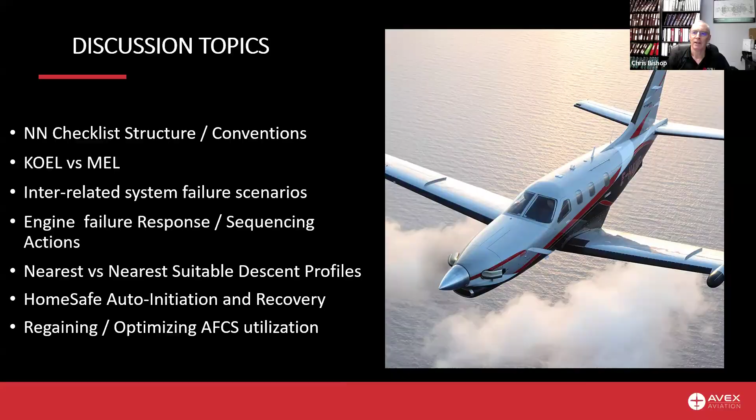So continuing on from that list of topics: non-normal checklists, of course, the POH gives you the fly the airplane directive. And despite whatever critical situation is happening in the aircraft, keep focus on aircraft control. That's the imperative given in all of your non-normal checklists.

The next thing I want to bring to your attention is the definition of land as soon as possible, which means land at the nearest suitable, versus land as soon as practicable, meaning nearest suitable runway with convenient facilities or operational considerations for, let's say, crash and fire rescue, or perhaps there might be maintenance on the field that would allow you to be serviced and then continue the trip, versus stranding yourself somewhere where recovery might not be as convenient.

Maybe you need something to take care of passengers. If you were to land at a very short field, are there any emergency services for injuries or medical services available? Those are practicable concerns.

Nearest possible really does mean absolutely the airport right underneath you. I mentioned in the presentation I did in person at the safety seminar, there was an owner who bypassed one or two suitable places to land, but his truck was located at the destination he wanted to land at. He continued on and landed safely, but was violated by the FAA for not landing as soon as possible. I'm not sure the definitions or the metrics the FAA would use for something like that, but certainly something to bring into your list of considerations.

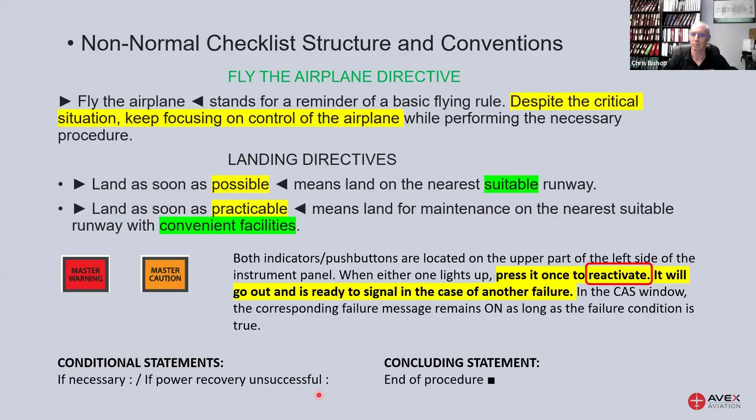So when you're reading the non-normal procedures, you'll get to a conditional statement. That should cue you to ask: am I concluding the checklist, or do I need to move on because this isn't the actual end of the checklist, since my conditions aren't meeting the concluding statement conditions?

All right, this is the kind of operation list versus the MEL. The day and night VFR operations, anything in all of those kinds of operations listed in the POH, it says specifically must operate perfectly according to the indicated type of use.

In addition to the above equipment list, you also have flight into known icing, pressurized flight, and RVSM operations. So keep in mind things that are going to be required for each of these types of operation must operate perfectly.

As a ferry pilot or service center pilot, I'm regularly going to retrieve an aircraft with known defects, and I have to determine whether or not I meet the conditions to operate perfectly for the type of operation. But as a discretionary departure pilot, you could really decide, is this something I can classify as operating perfectly for the kind of operation?

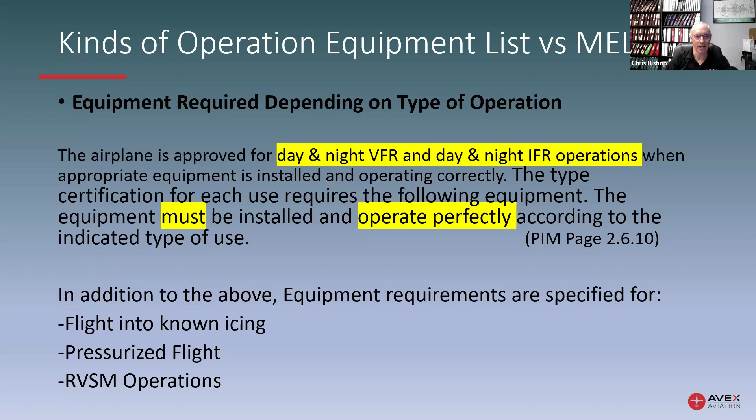If, on the other hand, you have an MEL, the MMEL is a generic per-model list created by a company like Jet RVSM. From that generic MEL, they'll build you an aircraft tail number and owner specific version. You'll notice here I've blanked out the tail number and serial number, and the title page had the name of the owner operator. So this is specific to each aircraft tail number and owner. It also requires training and authorization before operational use.

In any of these MELs, you'll notice right here where it says O and M. Those indicate there is an operational requirement - that would be a pilot procedure listed in the MEL. And then an M for maintenance procedure, meaning there's something a maintenance technician has to do prior to being able to operate under the conditions of this specific MEL.

You'll notice that for any of us operating on a KOEL, a loss of a standby generator would be a no-go. However, under an MEL, we could operate with a standby generator inoperative as long as we meet the conditions listed here. One of the risks here is that you're given the latitude to operate with a lesser order of redundancy, which increases operational risk because you have less system redundancy. So it requires the discretion to know, am I really not going to go into icing conditions as listed on this condition? Should I do this, rather than can I do this, should be the operating mantra when using an MEL.

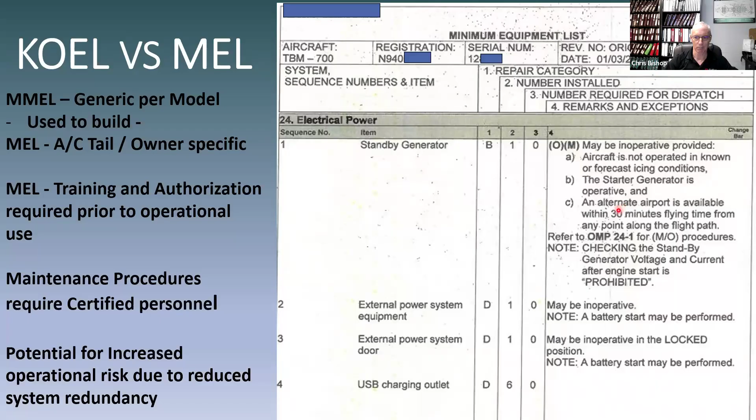The interrelated system failures that I had gone and done research on, I'll go through these items one at a time. I won't read the whole list here - I'll just work my way through it.

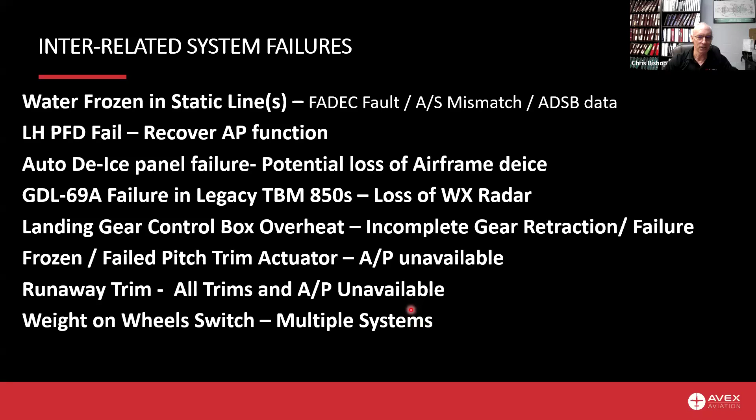The first one I want to go into was an actual scenario I ran into picking up an aircraft to go do a sales demo. This was in a 960. As I began to level at 280, the first thing I saw was a FADEC fault message. Now, the FADEC fault message was not actually a FADEC fault - it turned out to be a static fault.

So you'll see I pulled up the FADEC fault message. Not a lot to look at here - basically, fly the airplane, land as soon as practicable, and of course you're no-dispatch when you get on the ground. So that came to mind when I thought of where I would want to land.

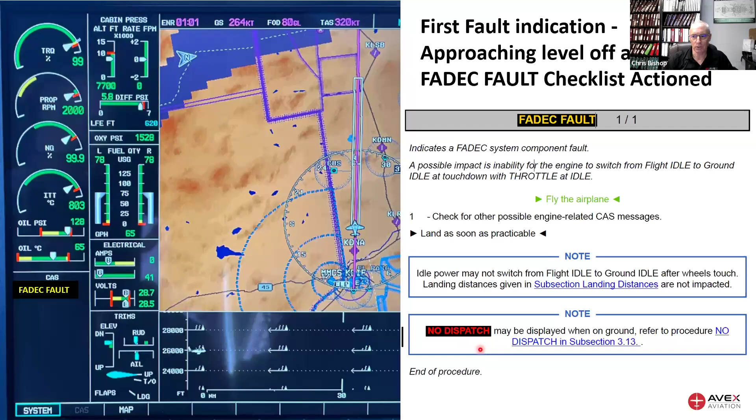So the next question was, while reading this checklist, I look out of the corner of my eye and see an IAS fault indication. So the actual indication of the fault was the IAS flag telling me I had a static fault. I then disconnected the autopilot because it was flying off erroneous airspeed and altitude information. Then, hand flying the aircraft, I pulled the alternate static source and, flying only on the standby instrument by hand, started reading the airspeed unreliable checklist.

As you'll see here, it says: check that your pitot heats are on, check your alternate static source, and then use the standby instrument only. And if the symptoms persist, perform a precautionary approach, maintaining appropriate airspeeds.

ATC told me they saw me descending, even though I wasn't, because the static fault was giving them erroneous data - also my ADS-B information was faulty. So I asked for a block altitude between 24 and 280 to give myself some leeway while I sorted out the error. Eventually, because I had VMC down to about 10,000 feet, I asked for a descent below 180 and canceled IFR.

While I began that descent, however, my airspeed began increasing. With a blocked static line, as you descend, the airspeed will increase. That could cause an overspeed indication, which would cause the stability and protection system to take over, engage the autopilot, and try to pitch the aircraft up to keep me from overspeeding. So to avoid the max speed, I reduced thrust substantially and maintained speed within the indicated airspeed range.

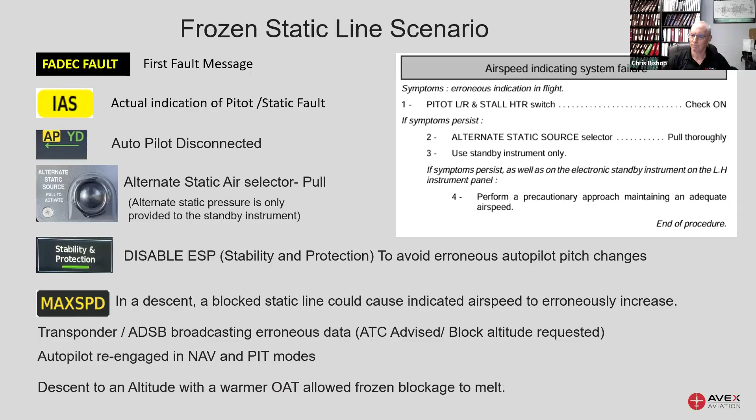Another indication that one of our owners had was a failure of his left PFD. What he had was the screen on his left-hand PFD completely went blank. Then the autopilot kicked off, so he was hand flying the aircraft. He tried putting the display backup button to send the information to the center MFD.

That didn't allow him to re-engage the autopilot. If you read the checklist for that version of the 930, the legacy 930, not the NG, it recommends you press the offside display backup button and then transfer, and then you can regain the autopilot. In his case, he was not able to regain the autopilot using the normal onside. I've tried this in a number of aircraft, even as recently as yesterday and today, and it really is dependent on the software version of the aircraft, whether you're in a G1000 or a G3000 Legacy versus a G3000 NG.

In a 940 and a 960, in both cases, the autopilot remained engaged. It was a simple onside display backup button to bring your data to the center MFD. I tried it in an 850 non-NXI, and it kicks off the autopilot right away. However, a simple transfer and an offside display backup to bring the center MFD data, and the autopilot was able to be re-engaged. The autopilot functionality should be able to be regained in almost all scenarios, unless you also have an AHRS failure.

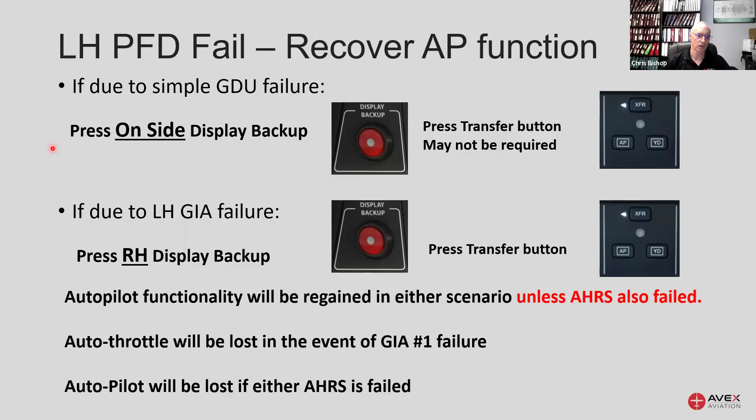This is a picture from yesterday in a 940 with the PFD number one circuit breaker pulled. You can see that I've also lost my GTC number one. In this particular case, the autopilot is still engaged. So all I had to do was onside display backup and bring my data to the center screen. And I never did regain my GTC number one until recycling power on the aircraft.

An interesting scenario. This did not happen in a 960. I also just tried it today in a 930 NG, and it did not give me the loss of the GTC. So really software dependent.

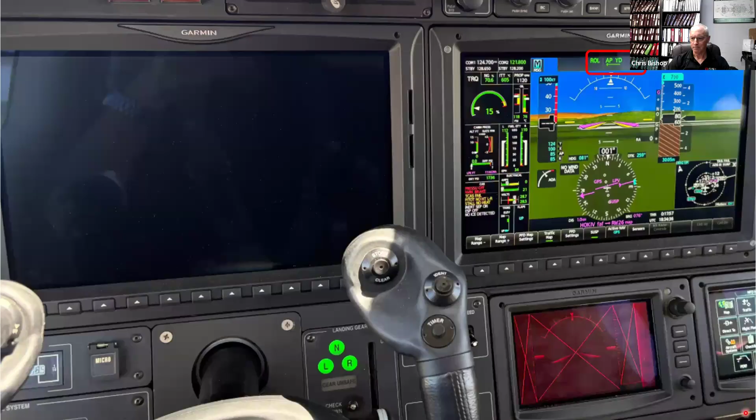In this particular scenario, I've given you an outline of everything that's on each of the GIAs, and you can see there's a lot of different interrelated systems connected to the GIA. So the GIA is not a single unit all by itself. What it is, it's a combination of circuit boards plugged into a processor. So you could lose individual components. So to say you're losing the GIA is a bit of a misnomer in the sense that it isn't a single unified piece of equipment.

However, you'll see here that AHRS number 1 can feed its on-side GIA. It can also feed its off-side GIA. However, losing either of the AHRS does cause a loss of the autopilot. If you end up with a both-on AHRS X message, chances are that you will have lost the autopilot and won't regain it.

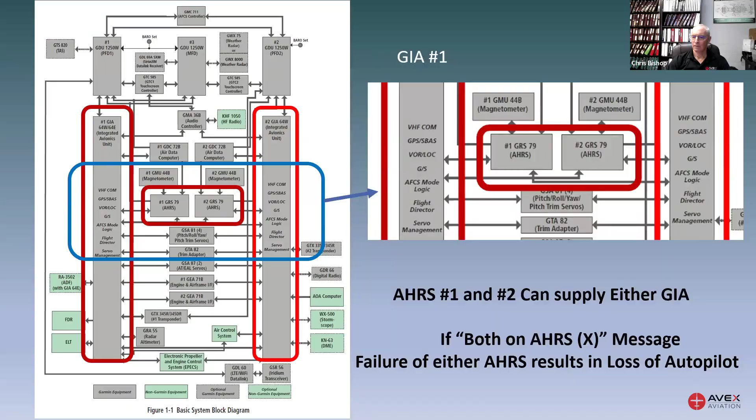In the event of components or an entire loss of GIA number 2, you can see there's a number of items that you would lose along with that GIA, including your NavCom number 2, your transponder number 2, the TAWS, HomeSafe, and the autopilot drops off and you'd need to accomplish a transfer. If you were transferred onto the number 2, you'd need to transfer back. An unlikely scenario, I'm sure, for most of you.

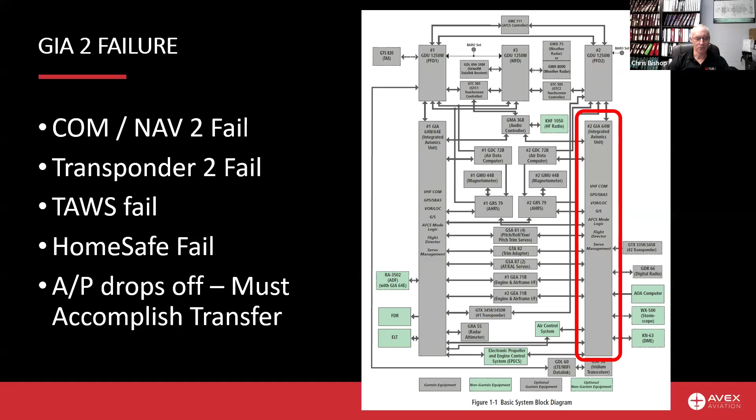Here's the AHRS failure checklist. As you can see, we get to a place here where we're going to have a conditional statement. Continuing, if both AHRS 1 or 2 is annunciated or not associated to heading, pitch, or roll, the PFD 1 and 2 sensor soft keys reset, and then if the annunciation checks off, then you can use the autopilot normally.

So follow the checklist, look for your conditional statements, and if you meet certain conditions, you then could regain your autopilot functionality. I'll leave it to you guys to really read through the checklist and verify that you're following the logic. Sometimes it is a little bit obtuse.

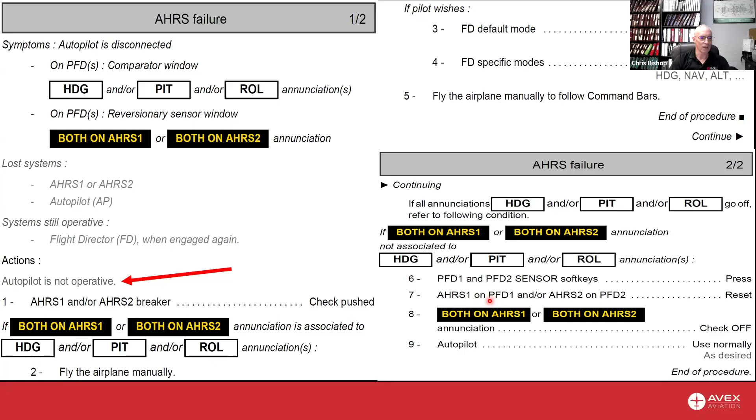Another failure that we had: one of our owners reported that their ice detection fail CAS message came up. The boots continued cycling, the inertial separator was stuck in the on position, windshield de-ice was on, and the prop heat stayed on. All of these systems are allowed to operate continuously.

As you see in the note, it says in case of failure, they'll be forced on for the remainder of the flight. There's no time limitation on the use of the de-icing systems. In this particular case, if the windshield overheats, the overheat mechanism should cause them to shut off while in an overheated condition, so that would protect you from an overheat.

The prop heat, when you get to the shutdown, normally we wait for the AUX boost pump before turning the master off. I would recommend, if you had this condition, as soon as you shut down, within 15 seconds, go ahead and shut power off so that you don't overheat the prop de-ice blankets and cause a delamination, potential for delam on your composite propeller.

In most cases, this fault has reset after a power cycle of the aircraft. So that's the one admonition I would offer on this particular failure: just make sure that you get the power cycled off before you exceed 15 to 20 seconds with the propeller not spinning, cooling the prop heat blankets.

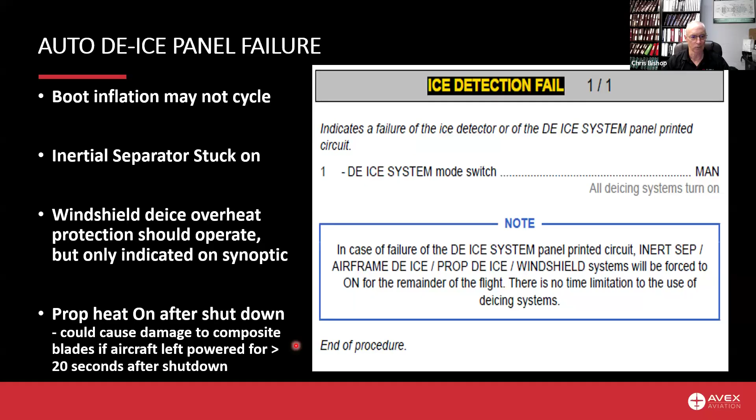For those who have an older aircraft, if you had a legacy 850 with a GDL-69A, in that version of the aircraft they didn't have enough ports to plug in everything. So the weather radar, the only port that they had available was on the GDL-69A instead of the GIAs in that aircraft. So this serial number range is, if your aircraft is affected by this, if the GDL-69 were to fail, you would then also lose your weather radar.

If you're getting your XM weather via the GDL-69A, which is where you would get it, you'd also lose your XM weather. The only weather that you would then have available to you would be the FISB weather. So if you're lucky enough to have an ADS-B in transponder that brings in your FISB weather data, that's how you would have weather in that particular failure scenario.

Probably not all that prevalent for most of you. However, for the serial number range affected, I kind of want to make sure and mention this.

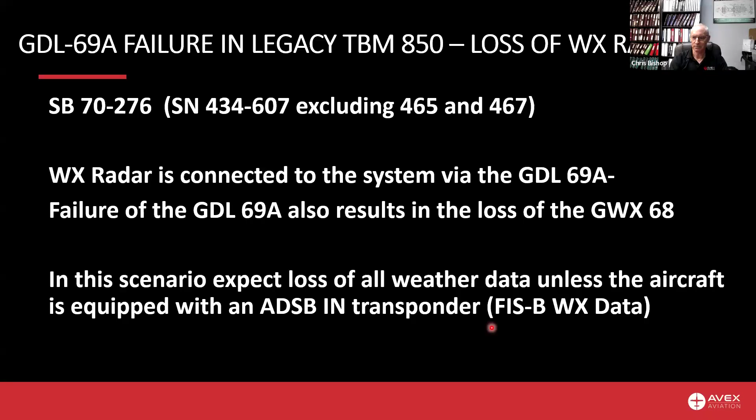All right, we also had an issue recently, actually more than one, where we've had a landing gear control box overheat issue. There was a service bulletin, and there's a thermal switch that was limited to 140 C that was causing the problem, and it disabled the entire landing control box.

So putting the gear down using the normal method was not working, so it required resorting to a manual extension. The first indication people were getting was that their climb performance was not what they expected it to be, meaning either full or partial gear retraction, leaving landing gear hanging out in the wind, causing them reduced climb performance.

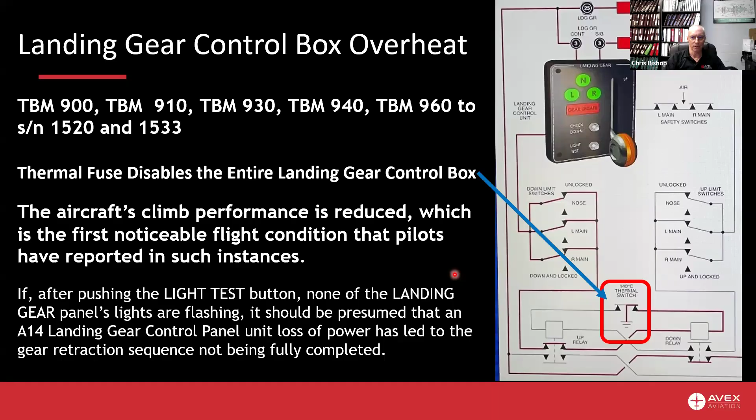If after testing it with the lights test button your lights are not coming on, that indicates that the box has failed. So Daher's flight information letter, emergency landing gear extension procedure, reminds you of the necessity to perform that procedure if in any doubt.

So we had an owner who was flying along, was having the limited performance because the gear was still hanging out. The lights were not coming on when he pressed the buttons on the box. To keep him from having to continue to a service center, after reminding him that this procedure was necessary, we also then suggested pulling the landing gear circuit breaker, the landing gear signal breaker, and the landing gear control breaker. And that reset power to the box, which then allowed normal operation.

This is not a recommended procedure. I leave it entirely to your discretion if you wanted to go outside the box. It's a bit off the reservation, and I can't, as a service center representative, make a recommendation, but I'm advising you that this exists for your own discretion. The CYA from Daher is thou shalt use the emergency landing gear procedure if any questions exist.

If you are affected through the serial number range 1533, this replacement fuse, I believe, is part of the procedures being implemented as the aircraft come in through normal cycles of service evolution.

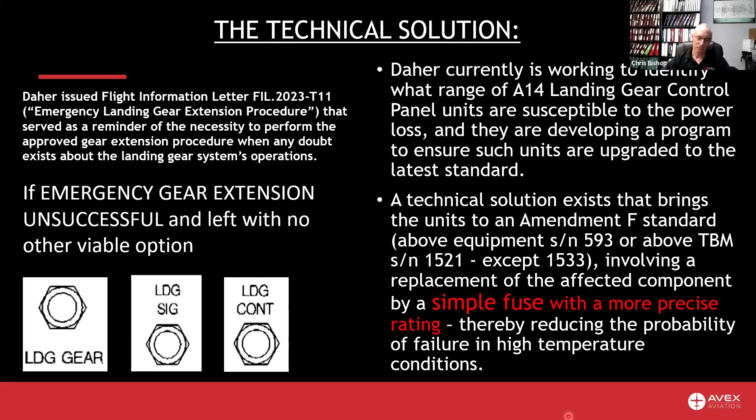Any of you guys flying a TBM for any length of time will be familiar with this concept of the drain holes on the pitch trim actuator boots. The one thing that we don't kind of talk about is what would be the first indication. Most of us would notice this elevator mistrim condition.

The autopilot would normally be trimming it. If it shows this elevator mistrim condition for a length of time, that might be an indication that the pitch trim servo is holding a sustained load longer and greater than is normally accustomed, which would then trigger someone like myself.

I would think automatically, let's get a control steering button push and see if the pitch trim or the pitch servo is holding a load. If so, manually trim, which would kick off the autopilot, and then I'd see my pitch trim is not actuating. Now try the manual pitch trim and see if that's also jammed because of a frozen actuator. At that point I'd want to maintain the trim speed and get to warmer air and melt the ice off to regain functionality.

Not something we're going to see very often, probably never, if you've done an adequate pre-flight and checked for either stripes or visible holes during your pre-flight inspection.

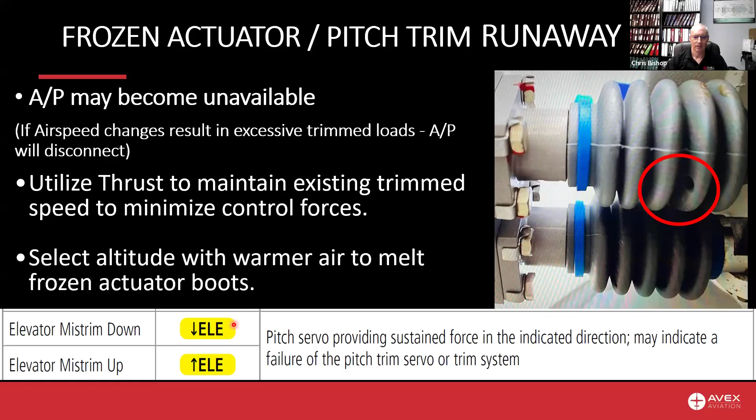If you had a trim runaway, which is a different scenario, the autopilot trim disconnect button is the memory item, listed in the box there as autopilot trim disconnect push button. Now all three trims are disconnected.

Then you could turn the autopilot trim switch to off, and then release the autopilot trim disconnect button. Now pitch trim is available to you with the manual trim, but the rudder trim and aileron trim would no longer be available. So in the event of an actual runaway, you'd also lose the electronic stability and protection.

Rudder trim in the arrival portion of the flight would probably be the highest threat item in a trim runaway scenario, where you've disconnected all of the electric trims for the aircraft and you're only on manual pitch trim.

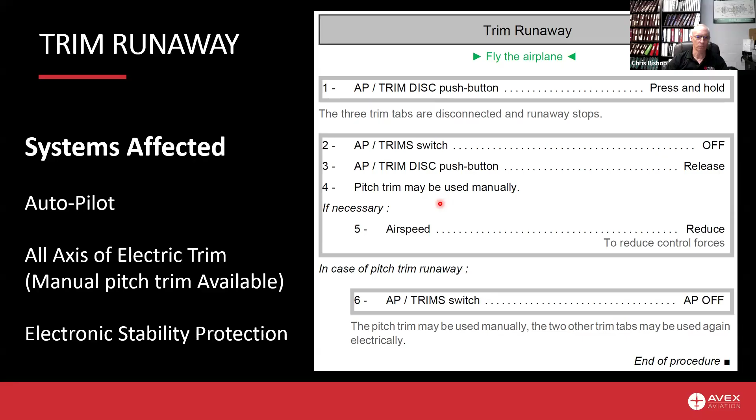Another one, not very common but worth considering, shows how many systems are tied into one particular switch. In the event of a weight on wheel switch failure - not a big item for most of us - the Hobbs time wouldn't be recorded, but your ground fan would remain on, and you wouldn't, in theory, be able to retract the gear.

Your stall heat would remain in its low setting and wouldn't go to high for in-flight. Your transponder would have to be manually switched to the on position. Cabin would not pressurize. And radar, most of us wouldn't concern ourselves with unless problematic, but you'd have to turn it on or off manually. The most important issue is if you took off and couldn't retract the gear - we'd be looking at returning to base right away to get this serviced. But I thought it was an interesting example of how many systems are tied into this one switch.

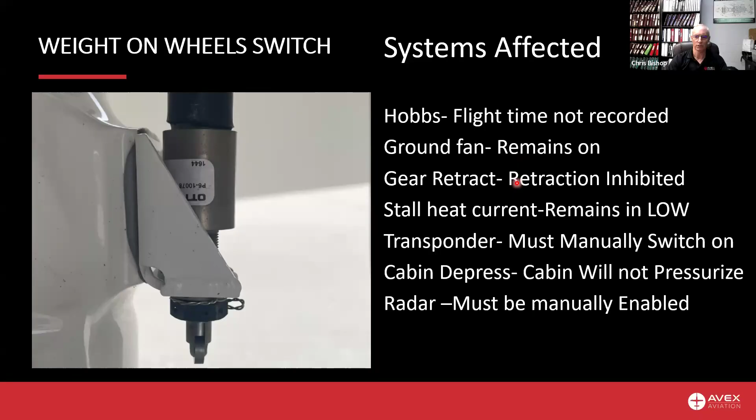For those of you who have electronic stability and protection, being able to turn it off, in my mind, is just as important as having it. We've had a number of owners who didn't know how to turn it off and were occupied mashing the autopilot trim disconnect button over and over to maintain control of the aircraft when erroneous data was being sent to force this electronic stability to kick on.

If you have a G1000, it's a simple matter of going to the AUX system, then looking for setup - AUX system setup, then setup number 2 - and you'll see the disable or enable radio button there on stability and protection.

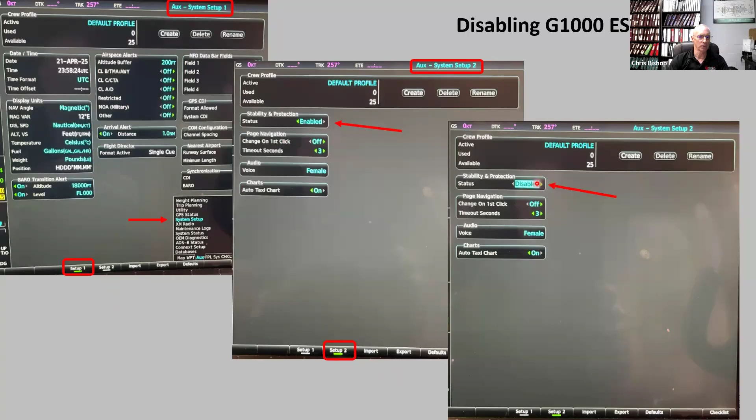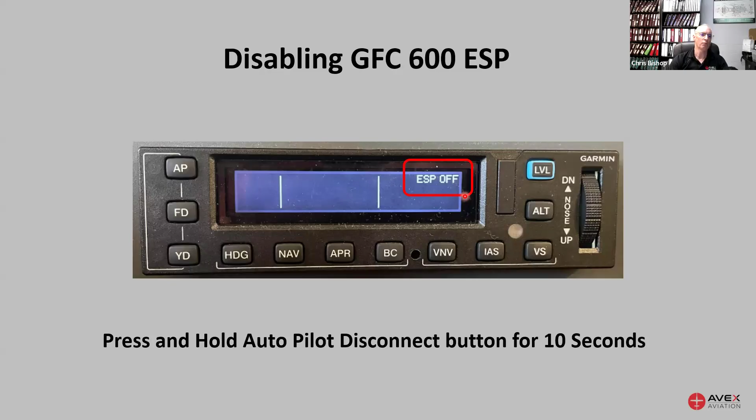If you have a GFC 600 autopilot, pressing and holding the autopilot disconnect button on the yoke for 10 seconds will cause ESP OFF to annunciate on the display window. Now ESP is off until you re-engage the autopilot, then it automatically kicks it back on again - or should I say enables it and arms it for future engagement.

If you have a G3000, again it appears more convoluted, but for those familiar with it, it's simply go to the home screen, setup, avionics settings, then scroll down and you'll see the stability and protection icon there. Simply tap the radio button to disable it.

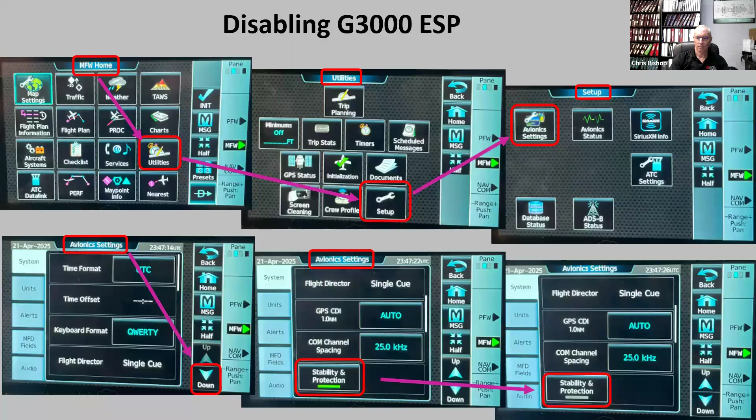All right, that's the end of our discussion of interrelated failures. Some of it's relevant, some of it may be a bit obscure and highly unlikely. I appreciate your forbearance in listening to the stuff that is not related to your aircraft type.

To the discussion about land as soon as possible versus as soon as practicable, I broke this down into groups of considerations. Obviously the first and most important is the aircraft - let's get the aircraft to our best glide speed. That gets us the greatest amount of time to make a decision.

One of the things most of us will do is if the engine failed at 31,000 feet, we're thinking oxygen. I didn't put that here as the very first option, but obviously if your cabin altitude is at, let's say, 9,400 and the bleed were to stop coming in because of an engine failure, your cabin altitude is going to climb very quickly.

So the first thing you're going to look for is, let's get to the best glide speed. And is my cabin uncontrollable? Is it coming through 10,000 feet?

Let's get the oxygen on. For those of you who haven't really done a lot of practice getting the oxygen mask on, my recommendation is to flop the harness forward over the front of the mask and simply put the mask on your face right away. Then take off the headset, the sunglasses, and inflate the harness and pull it over your head, then release and allow the harness to hold it. Get the mask on your face first things first, and then you can arrange the harness and the headsets afterwards.

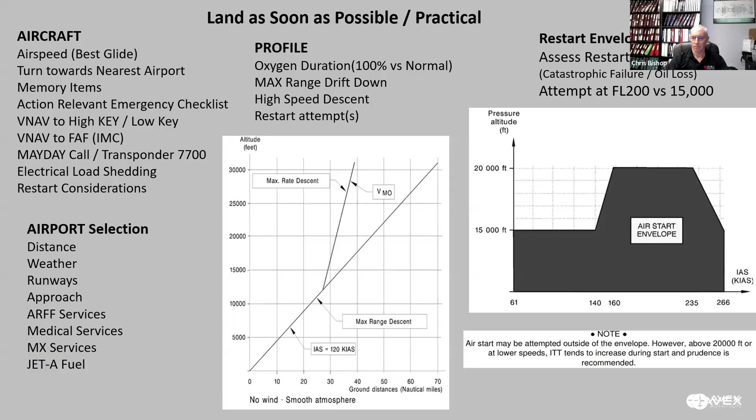Most of us have not spent a lot of time with the oxygen masks. I recommend every time you check the oxygen during your pre-flight, verify that this 100% button is in the down position. The lever down indicates 100%. If you move it to the up position, what that does is it mixes ambient air with the oxygen to extend the range of your bottle. For every emergency that we can ever conceive of, we should always start with 100% oxygen, then as needed, move to the ambient selection.

In the event that you have smoke in the cockpit and you want to evacuate smoke from the goggles, you could select the emergency to on, and that would blow air, force air through the little window in the front of the nose piece into the goggles to clear smoke from the goggles. You could use this also as a pressure breathing device if you really needed pressure air during a rapid depress. Again, a highly unlikely scenario, but it's good to have the familiarity with what the features of the oxygen mask are.

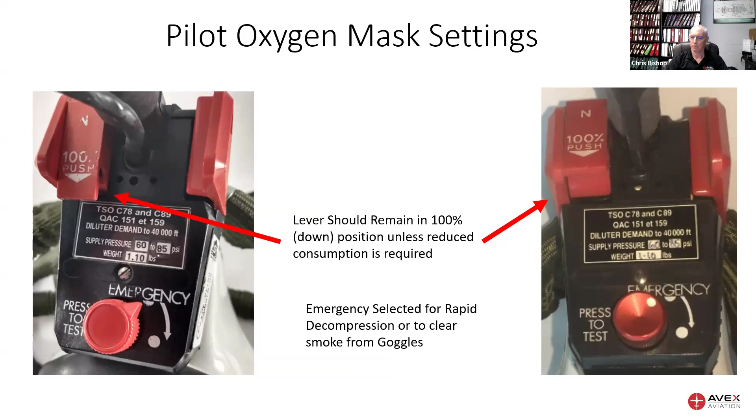The auto deployment of your O2 masks, the manual says between 12,500 and 14,750 feet. And of course, to get those passenger oxygen masks to deploy, the pilot O2 mask switch must be in the on position. You can manually deploy them by removing the little plastic cover piece and actuating the passenger oxygen switch.

I test this on every test flight that we do. I verify that it automatically deploys. If it doesn't automatically deploy, then I manually deploy them.

If one or two of them fail to deploy, it's good to know that the cover can be removed manually by the use of a pen or some other device to pry the cover off. It's simply attached with tension clips. And when the masks do fall, there is a lanyard that has to be pulled to get the oxygen to flow, much like the announcement you've heard on every airliner you've ever sat in the back of.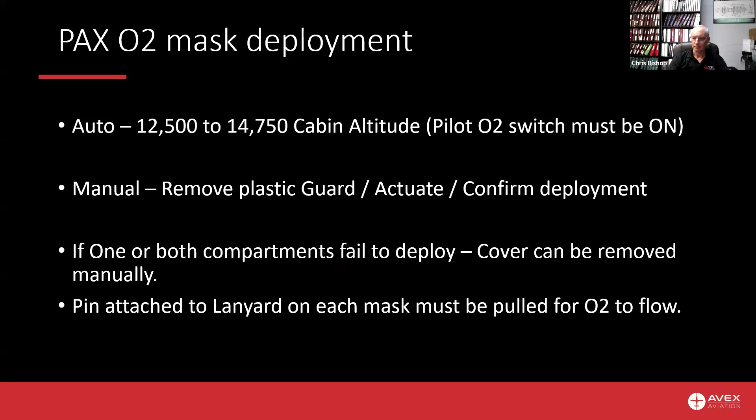Let's talk a little bit about engine failure scenario. I'm not sure if you guys have done the same as I have. I've run the thought experiment while I'm in the middle of a long flight and thought, okay, what would be my first action, second action, third action? And I have to admit, I have struggled to come up with a more or less universal series of actions. It is somewhat scenario dependent. I would have a different set of actions at 5,000 feet than I would obviously at 30,000 feet.

So one of the most important items, and I asked this at the presentation that I did in person, which one action is going to be the most critical to making sure that you have the most amount of time to make your decisions? And that is get the propeller feathered. In fact, if you lose the engine, you're soon enough going to lose oil pressure. If you lose oil pressure, the oil pressure to the propeller hub is going to diminish to the point where the springs are going to force it to feather anyway. So I may have been a little less clear on that in the in-person description of this.

It's my theory that on every single takeoff, I'm going to climb at VY to 10,000 feet. For most of us, that means 130 knots. For our auto throttle aircraft with a VNAV profile of 124 knots, that would be your FMS climb for VY. 130 knots is what's on all the test flight forms that I do, so I typically climb at 130 knots to 10,000.

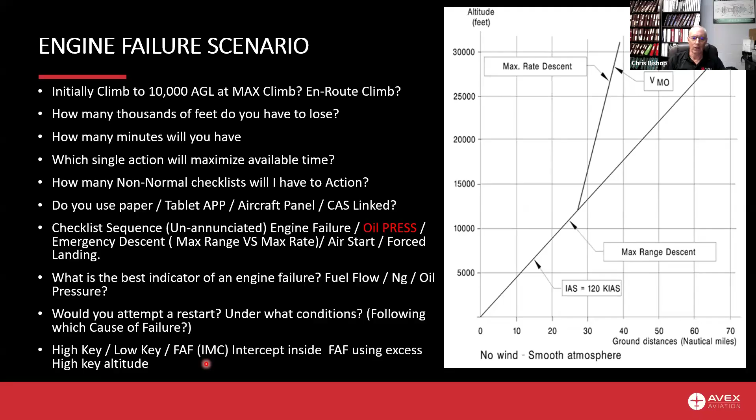Under what conditions would I attempt to restart, and what caused the failure? Then, of course, my high key and low key—am I going to be able to get myself set up for a landing on an airfield, and how do I go about doing that best? Let's take a look at some of the high key and low key stuff here in a minute.

If your shutdown is unexpected, as in a flame out, low fuel pressure, fuel filter clogging, or fuel tank vent clogging, there's a chance that I might have a restart. If, however, it was checklist directed, such as an oil pressure failure, excess oil temperature, or engine fire, chances are I'm not going to be doing a restart. So that kind of excludes that whole portion of my thought process.

Optimal altitude, 15,000 or below. If it's your max range, 120 knots. If you are doing a max rate descent, up to 200, if you're running enough ram air into the engine, you could start a restart at a higher altitude.

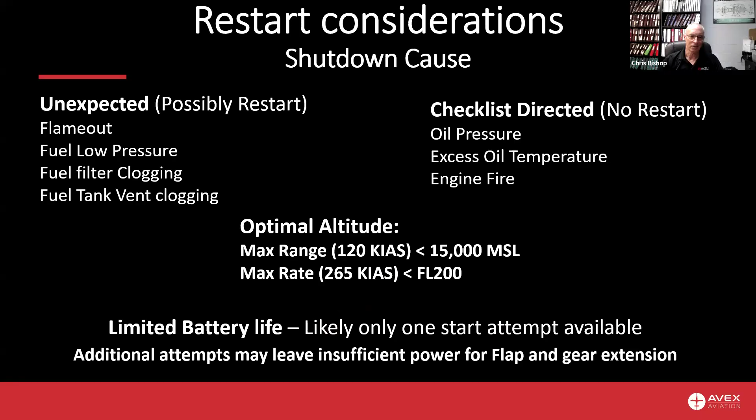I've had the discussion with a number of people about how many restarts we'd expect to complete, depending on the health of the battery. I've seen a full engine motoring followed by a 1 minute cooling and then another engine start, and the battery is in great shape—so you might be able to perform more than one engine relight. But again, depending on the cause of the shutdown, you may or may not be successful. If the battery life is just barely getting the thing started on the ground, well, maybe you're only going to get the one attempt. That's more an empirical situation, something best left to your own individual aircraft, I guess.

You'll notice here I've got two different speeds listed. They're showing on the chart about 160 knots, from 20,000 down to 15, decreasing linearly. Even here, they're showing 140 knots at 15,000. If I'm in a max range glide at 120 knots, chances are I'm going to need to be somewhere below 15,000 at least to get an acceptable restart.

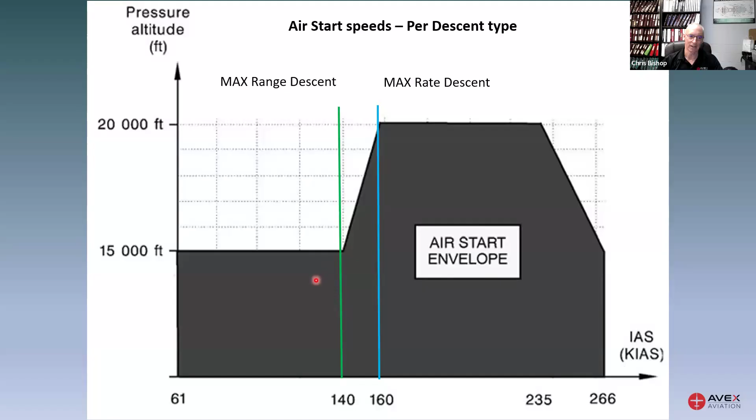I'm not sure how many of you have heard this high key versus low key discussion. I'll go through it briefly for those who have—I hope it's not too redundant. The objective would be to beam the landing threshold on the downwind at 1,500 feet, with an expectation that at this point you'd go gear down, first notch of flaps, and start a 180-degree turn to the runway. Somewhere on the base or short final, once you've assessed that you are definitely going to make it to the airport, you could go to full flaps.

So many of you that have tried this in the simulator know that this is a fairly good approximation. In some cases, you end up having to side slip to make sure you land somewhere before the first half of the runway. Having done this in the simulator and tried it in real life, I can say this does work.

So if I end up over the top of the airport, let's say at 3,000 feet, arriving at the threshold of the runway, a 180-degree turn started at 3,000 feet should put me at exactly my low key position. In the event I arrive at the high key position at, let's say, 5,000 feet, I have too much altitude to make a full 180, so I could simply fly straight ahead for 1,000 feet, make my turn, then fly straight ahead for 1,000 feet—taking the difference between the 3,000 feet and my current altitude of 5,000, cutting it in half, going outbound for half of it and inbound for half of it—and I'll arrive back at my low-key position exactly on altitude. That logic works too; I've done this multiple times in the simulator.

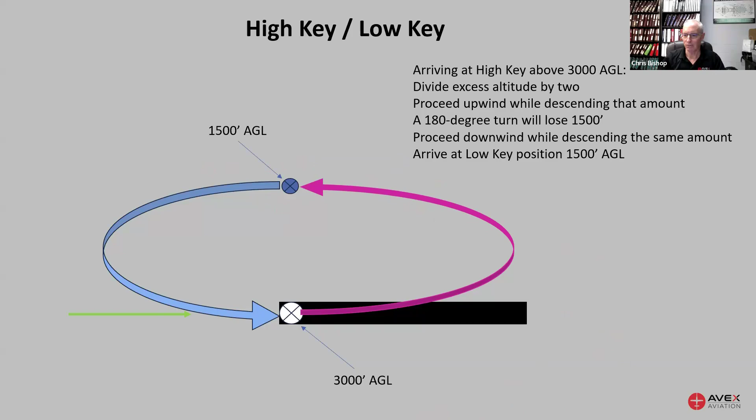Again, going to this idea of orbiting down over the airport, should I do this at 120 knots to give myself the most amount of time to run my checklists, make a Mayday call, get my passengers briefed and have everything really wrapped up and good to go? I may need that max range just to get to that high key or low key position.

In the event that there's no other options but to go to that max range drift down, my oxygen is a consideration. The pros for going to a max range drift down: it's necessary for an on-airport landing, it may be necessary for terrain clearance, it gives me more time to prepare and maybe get emergency services on site, and it gives me more opportunities to do a relight if there's a condition suitable for that.

If I had to do an instrument approach, maybe the weather is better at this farther away airport. Maybe they've got an instrument approach that's in line with the runway I intend to land on. And then maybe I can use my vertical planning tools. I can set a VNAV altitude constraint that gives me some kind of idea of how to navigate vertically to that high key or low key position.

The argument against the max range drift down would be oxygen consumption. I may not have enough oxygen for all the passengers. Medically, I may have older people or children, or for those of you with small dogs, that may prohibit really exposing them to a 20,000 foot cabin for an extended period of time. My battery consumption - I may need to get onto an essential bus tie and shed some loads. So that might be a consideration against a max range drift down.

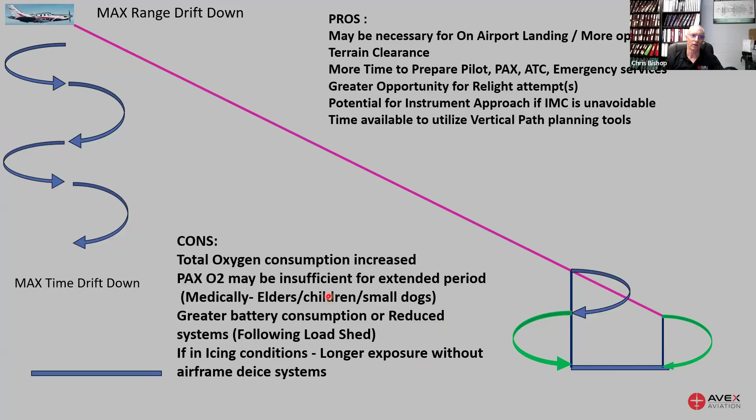If I had smoke or fire, that would certainly force me to make a maximum speed descent, even if the engine was not failed. If the engine failure checklist, or the checklist was forcing me - like an oil pressure checklist directed engine shutdown - that would be another reason to get myself down, hit the ground sooner than possible. A medical emergency with somebody in the back with a heart attack, for example, if the oxygen system was malfunctioning. If I had to do a high-speed descent, am I impaired due to some structural limitation of the airframe? That may change my considerations about how quickly and at what speed I'm going to descend.

If I had an engine fire or cabin fire, max speed descent - maybe do a little experiment. Next time you're up at a high speed, level the aircraft and count how many minutes or how many miles it takes you to decelerate from, let's say, 230 knots down to 120. Try timing that to see how long it takes to slow an airplane down. I've kind of given you some ballpark numbers.

If I was doing VMO to a high key position and I leveled off 2 miles prior, would I then arrive at my high key position at 120 knots? If I was trying to arrive at the low key position, maybe I'd give myself 3 miles to decelerate. And this is with an engine and the engine feathered.

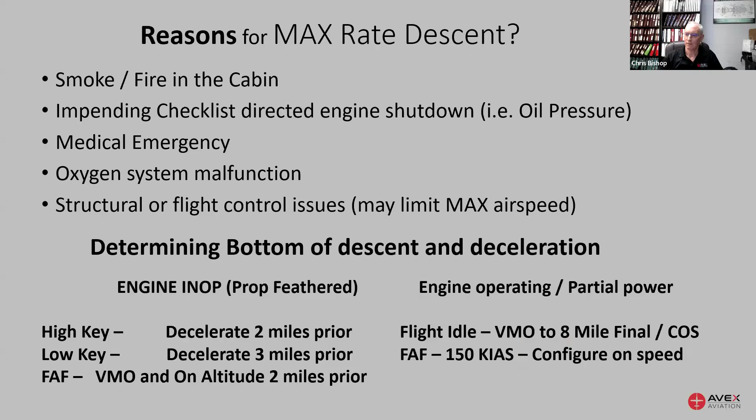Again, this gives you at 120 knots about 2 miles per thousand. I did this on a test flight one day, and my actual rate of descent with a simulated zero thrust up at 300 was about 1,100 to 1,300 feet a minute. And down below 10,000 feet, I was getting about 1,200 feet a minute. So you can use a ballpark number of 1,000 feet a minute, knowing that you need to buffer that with a little bit of a cushion.

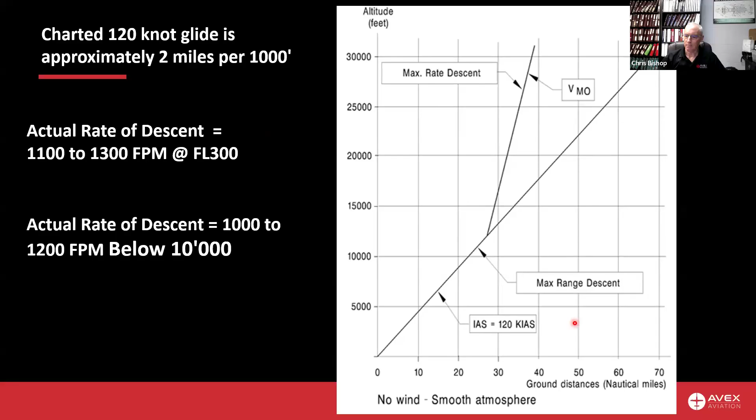I ran the thought experiment as well. What if I had to shoot an approach? If it's IMC and I've got no other choice, could I arrive at the final approach fix as a glider and have an altitude that would allow me to continue to glide above the glide path on the final approach course, hopefully break out before minimums, and be in a position to go gear down, flaps down, and land the airplane?

So I did some simple math. If I was descending at 1,000 feet a minute, that means I'm doing 500 feet per mile, right? So 2 miles per thousand at 120 knots. So 500 feet per mile. So if I had an 8-mile final approach fix, as I do here, I'm just going to double that and say 4,000 feet. So if I arrived at my final approach fix at 4,000 feet as a glider, in theory, I should be able to glide and arrive at the airport with those numbers.

But that, again, is based on 1,000 feet a minute, so maybe you'd want to buffer that by another 500 or 600 feet. Let's hope none of us ever end up in this scenario, but I couldn't help myself. I just had to come up with an idea of whether I could do it or not.

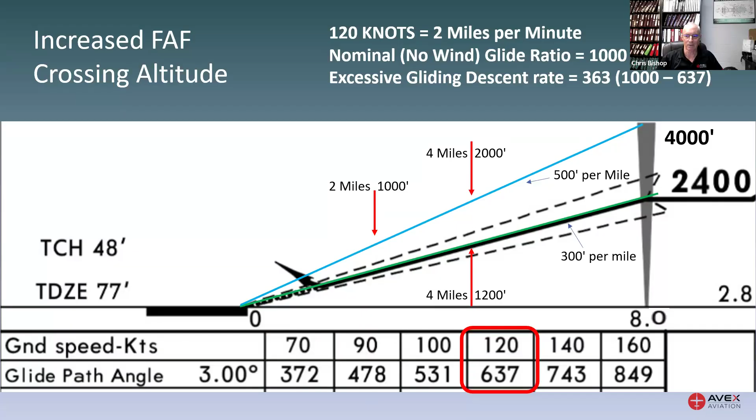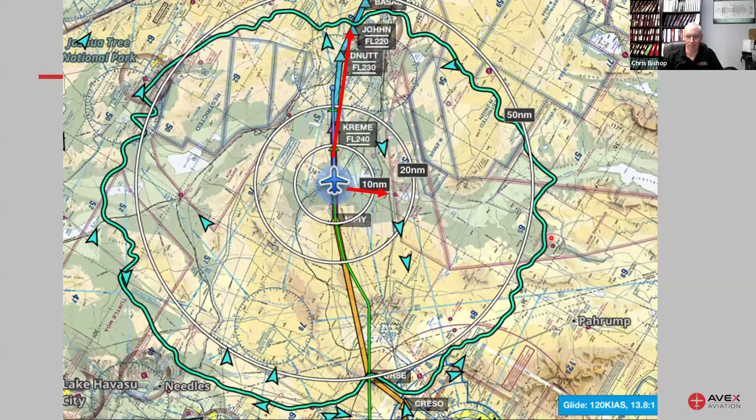So the question begs, can I go to Daggett? Can I glide there? Yes. Should I go land here at Baker, which I believe is only like 2,200 feet long? Is it suitable? Could I do it? Yes. Does it make sense for me to do that? Eesh, that's really a judgment call. Would the FAA look favorably upon my choice to glide to Daggett? A very interesting question.

So this is the Daggett information. I could easily VNAV to it. You can see that it's within the range of my glide ring - it's on the edge of the glide ring. This accounts for wind at my current descent rate, in theory. But again, this is one of those judgment calls that I think we all as aviators need to keep in our back pocket.

How would I make this decision? What would be the best course of action? What are the pros and the cons? But I'm running this kind of thought process when I start running out of options, as I was here.

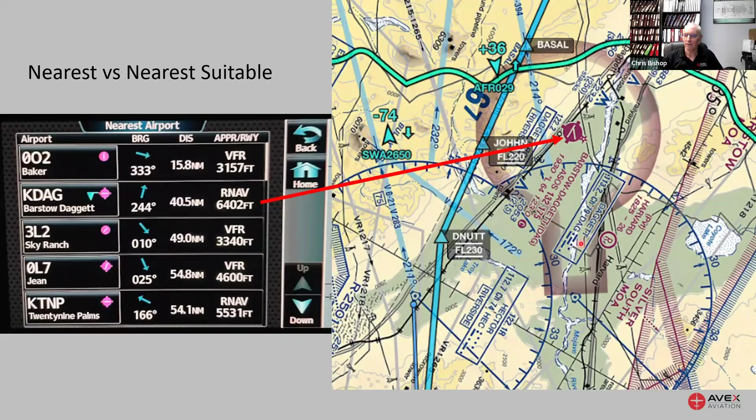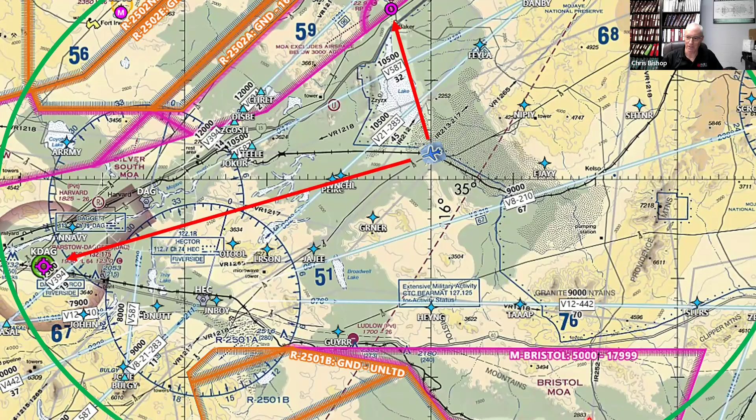So if you had a flame out for whatever reason - say you've had a fuel starvation issue because a fuel tank vent has clogged and you've developed a suction in the left tank - now you switch to the right tank, but by now the flame has gone out on your engine. So you switch tanks, you put the aux boost pump on. If you turn the ignition on, now you've got fuel and now you've got ignition. I might be concerned about bringing the thrust lever to idle and monitoring for an ITT, but at least that would get the flame back up and running again.

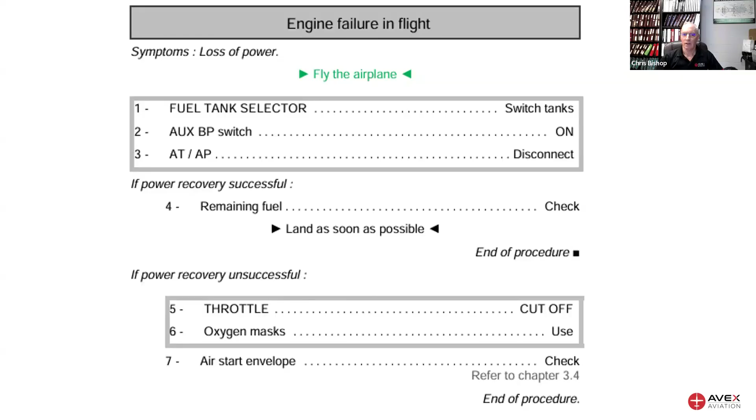Let's go ahead now and discuss home safe auto initiation and recovery.

The new SB and the software in the 960 includes a pilot inactivity detection system, and the conditions are listed here. After 30 minutes of inactivity, you'll get a CAS message. Three minutes later, if you don't do something, you'll get a caution message. Three minutes after that, you'll get a warning, and then eventually home safe activation. If you get home safe activation, you've got to answer ATC's questions about who's declaring a mayday.

In the event that you have your emergency descent mode activated, the aircraft will automatically set your heading bug to move 90 degrees to the left, and you will start a turn to that heading. It will set 15,000 feet as your target altitude, engage flight level change at 165 knots, and start you down. Once you capture 15,000 feet in EDM, you have 15 seconds to disable EDM, or home safe will activate.

If you have ESP activate because you've exceeded the ESP limits, you get an automatic activation of ESP in level mode. You have 2 minutes to change these modes to heading and altitude or some other mode besides level. After 2 minutes, home safe auto land will automatically activate.

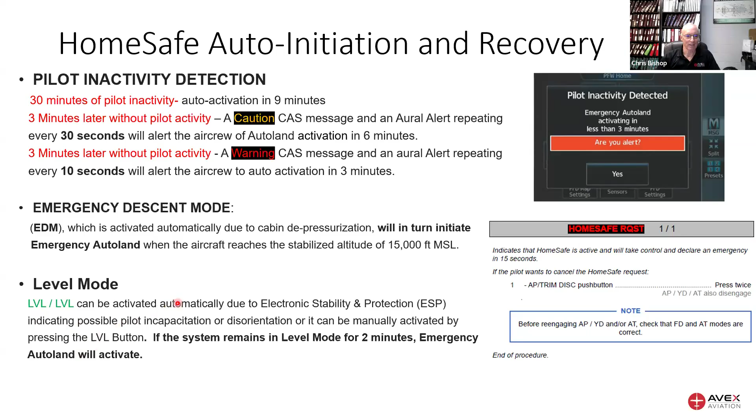So knowing what causes these things to activate is something that's not as well briefed, perhaps.

In the event that you do have an activation of HomeSafe, you'll get this splash screen on the center MFD, which will give instructions to the passengers in the event that you as the pilot are incapacitated. But these are all the systems associated with that.

This kind of goes back to our interrelated systems discussion earlier. You can see that it brings in a lot of different systems that you'll eventually have to regain control of if you decide to take control of the aircraft. I'll let you guys read the slide for a second, and I'm happy to share this, or I can point you to where it's listed in the G3000 Pilot's Guide.

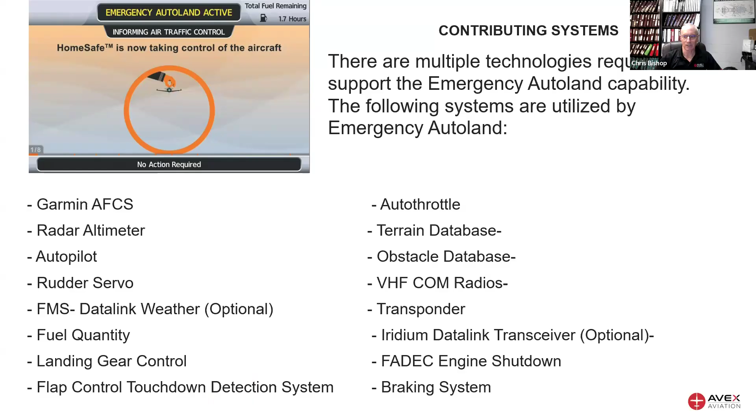In the event that you decide you're feeling better and you'd like to recover, or that it was inadvertently activated, this is what's recommended before taking control of the aircraft: control it using the PFD for primary flight control and indications.

Check your altimeter setting, as that may have been changed. Check the flap position — if auto land has put the flaps down partially or fully, you'd want to match the lever to the flap position. Same thing for the gear.

You'd want to set your flight director modes to what you would like, because the auto land system will have set it to what it deems necessary — that would probably be GPS and VNAV, or it could already be in approach mode. If you're recovering the aircraft and want to switch it to your control, taking your own mode selection would be necessary.

Check your active and standby radio frequencies, because it will have been broadcasting Mayday on 121.5. Your flight plan will have been changed, because it will have set a new destination where it chose to shoot an approach and land. So it's not recommended that you do this on short final.

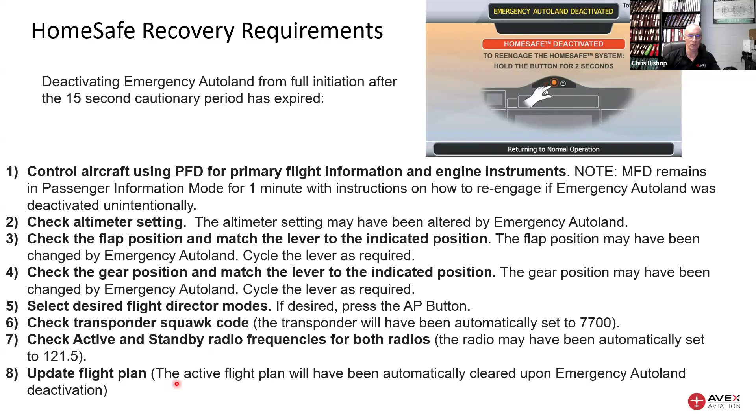Here is the checklist for HomeSafe deactivation, including aircraft config mismanagement. There's another checklist one would want to take a look at to verify you've completed all the required steps to take control of the aircraft again.

I've put together a list of items here — a reasonable sequence of actions: re-engaging valid modes, using roll and heading for the lateral course, and if you have an LOI indication and it's in dead reckoning mode, deselecting the current vertical mode and displaying pitch as the active vertical mode. This doesn't necessarily relate to HomeSafe — it's for if, for some other reason, you had lost the auto flight control system.

I'm not sure how many of you are familiar with or use control wheel steering. I personally consider that an essential feature for aircraft control and managing the auto flight control system, and also for checking the trim condition of the aircraft, and learning how to disable the stability protection — when to have it on, when to have it off. In most cases you'll probably never need to turn it off, but understanding the aircraft fully is part of good airmanship, in my opinion.

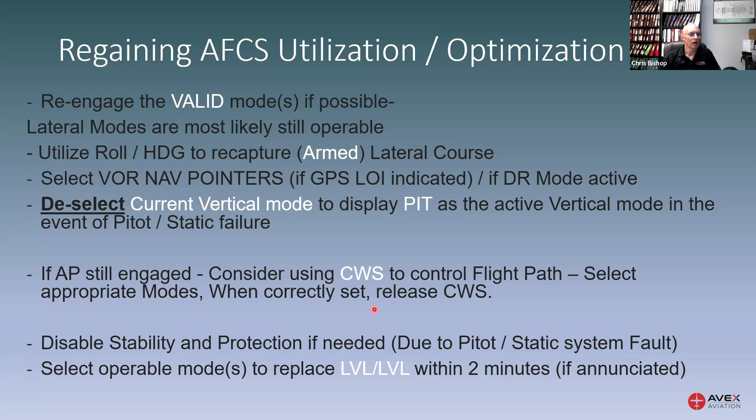I believe that covers all of the discussion topics. I'll open it up for any questions.

So, Chris, there were two questions, one from Tom McGrath relating back to the failure of the ice detection system and the ice control box failure. The question is, would you recommend pulling the circuit breaker for the prop heat if the box had failed?

Assuming the temperature on landing is greater than 0 Celsius, the concern is forgetting to shut down quickly in the urgency of the event. That's a great suggestion, Tom, I should have thought of that. Excellent idea. I think that should be in the checklist procedure. If they come out with an SB, it wouldn't surprise me if they suggest deselecting the circuit breaker so there's no chance you'll overheat the prop. I wish I had thought of that.

Okay, second question from Van Anderson: has anybody ever confirmed the accuracy of ForeFlight's glide ring?

That's a good question. It reads out as 13.8 to 1, so if there's a mathematician out there, that's 13.8 feet forward for each 1 foot down. What does that equate to in miles per thousand feet lost? You could do the math on it, that's what it's calculated at. If you look in the bottom right-hand corner, or when you go to select a glide ring on or off in the aircraft configuration in ForeFlight, it tells you what the ratio is. Hang on, I'll see if I can pull that up.